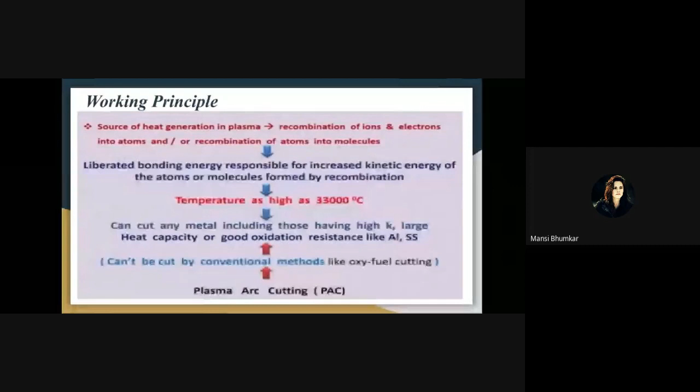Now this is a diagram. Okay, so here is this diagram, then I will explain.

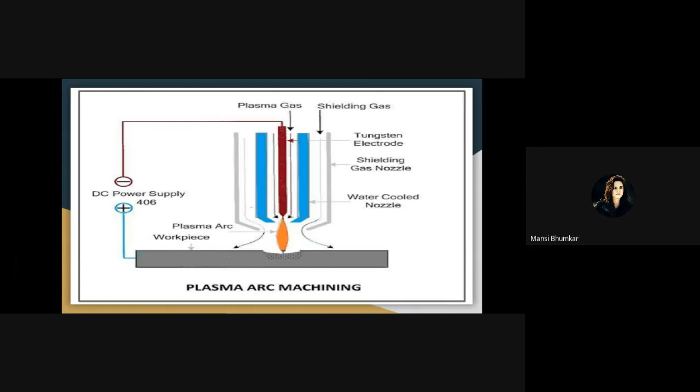The plasma gas is connected and flowing to the cathode. So surrounding this cathode, the plasma gas is coming and passing with a velocity. High velocity plasma gas is passing through the nozzle, and when it is passing through the nozzle, it is ionized. This highly pressurized, high velocity plasma gas is ionized.

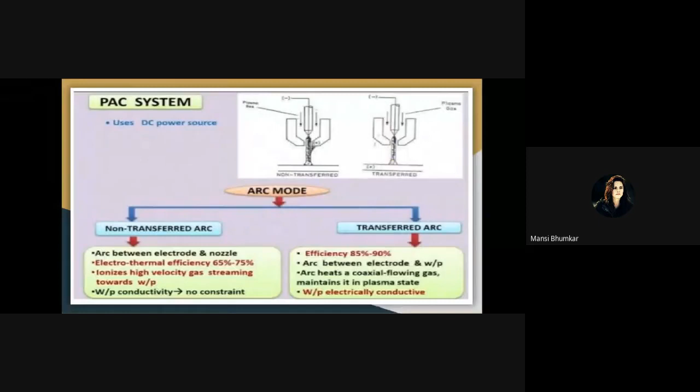So the plasma gas is coming, as you have seen in the non-transfer mode. Same way, the plasma gas flows surrounding this cathode electrode, and while it's passing through, it ionizes in this zone while passing through the nozzle. Here the electro-thermal efficiency of this transfer mode is very...

Now come to our point. I was talking about the transfer mode of this plasma arc machine. The case is that this transfer mode of plasma arc cutting can be used only for electrically conductive material.

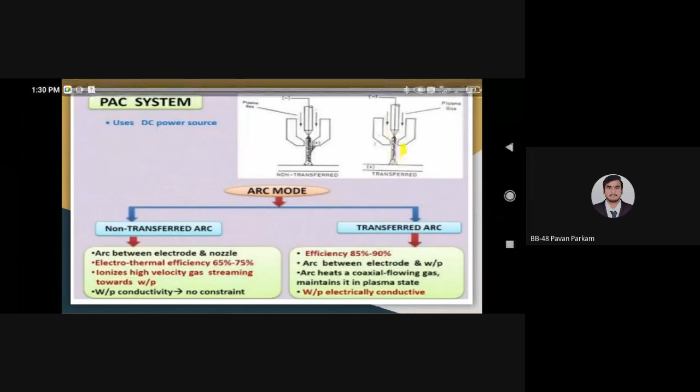Here you can see the plasma gas is coming surrounding the electrode, and while it is passing through here, it ionizes when it passes through the nozzle. The electrothermal efficiency here is very high, 85 to 90%, for this transfer mode of plasma arc.

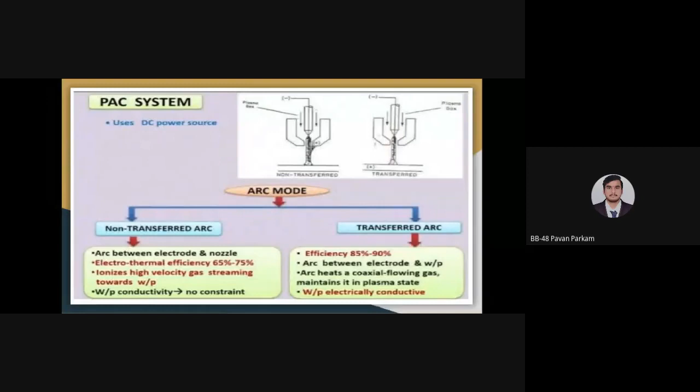So here, arcing is generated between the electrode and the workpiece, and the arc heats the coaxially flowing gas as well. So that coaxial flowing plasma arc actually maintains it in the plasma state only. I have written that also here.

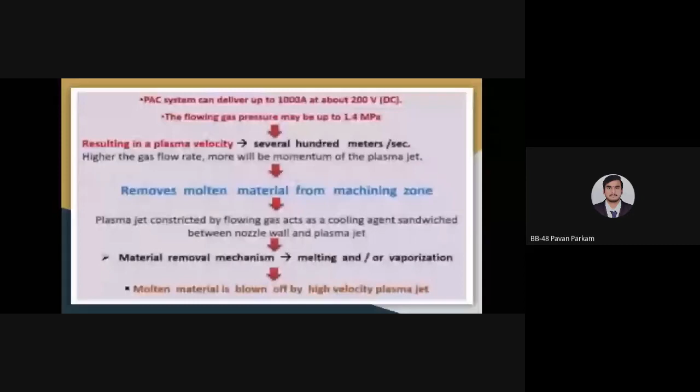Now this plasma arc system can deliver up to 1,000 amperes at about 200 volt DC.

This may be up to 1.4 megapascal. Because of this high pressure of the plasma gas, the plasma velocity is also very high at that time. So velocity is very high, and plasma gas can remove your molten metal due to the high velocity and high pressure. It can remove the molten metal from your workpiece surface. This plasma gas velocity is maybe several hundred meters per second.

So you can explore the momentum of your plasma jet. This high velocity of the plasma jet gives very high momentum of the plasma jet.

So whatever the metal removal process is there, that is by melting and vaporization, because as we know huge amount of heat is generated and the temperature rises around 33,000 degrees centigrade. This amount of heat can melt and vaporize the metal where this plasma jet actually touches on your workpiece metal. So here the plasma has temperature more than 33,000 degrees Celsius. Due to that only it is called the fourth state of the matter.

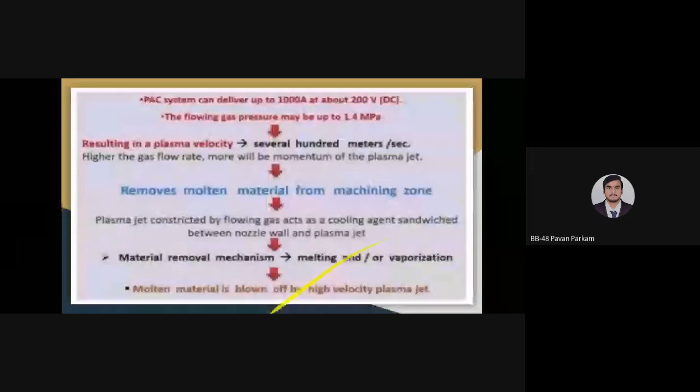There is a link between the nozzle wall and your plasma jet. As I mentioned previously, the mechanism from the workpiece is that of melting and vaporization, and that molten metal can be blown off by the high velocity plasma jet. So this is about the working principle.

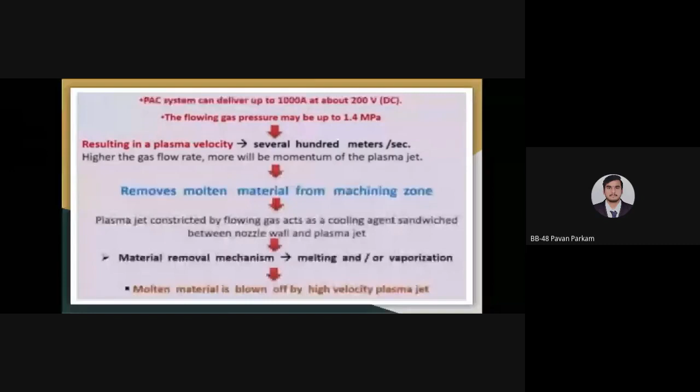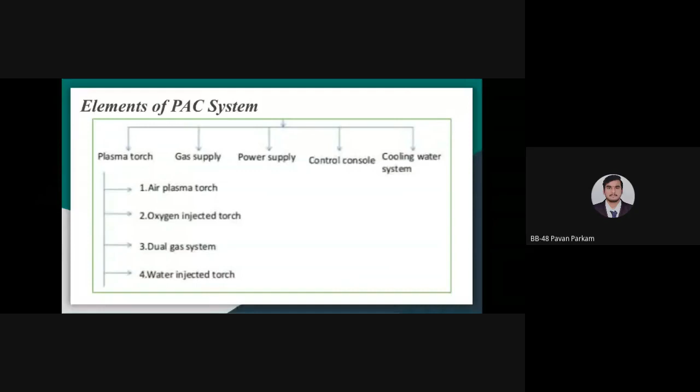Talking about this plasma torch, there are different kinds of plasma torches available in the market. You can see on the right side here a schematic diagram of the first one I have shown, that is the air plasma torch. So in this type of plasma torch...

This is a carrier gas, you can see the carrier gas is here, and that carrier gas is coming. Actually, carrier gas is your plasma gas, and normally that carrier gas is used as compressed air. So here compressed air is used. After flowing, it is going to ionize, and due to ionization plasma will be generated, and that is used for doing the cutting.

Here we have to take care that the air should be uncontaminated. If contaminated air is coming or some moisture is there, because of the huge temperature, it will damage the nozzle. If the air contains some micro moisture, and temperature increases, then it will damage the nozzle sometimes. So that is why your air should be filtered and uncontaminated compressed air is used as a plasma gas in this kind of air plasma torch.

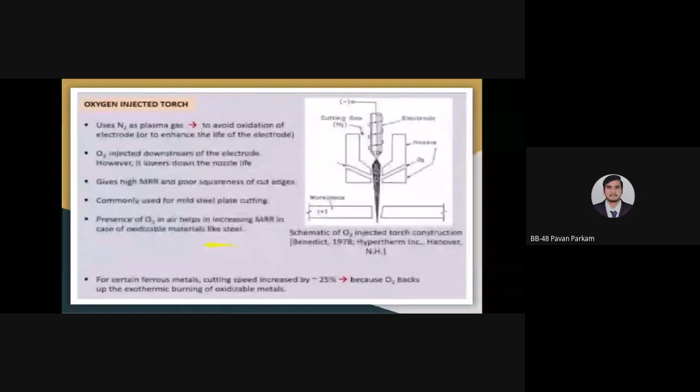This kind of air plasma torch results in a high degree of tapered machine surface. The cut surface on your workpiece shows high degree of taper. The electrode material normally used for this kind of air plasma nozzle is hafnium or zirconium.

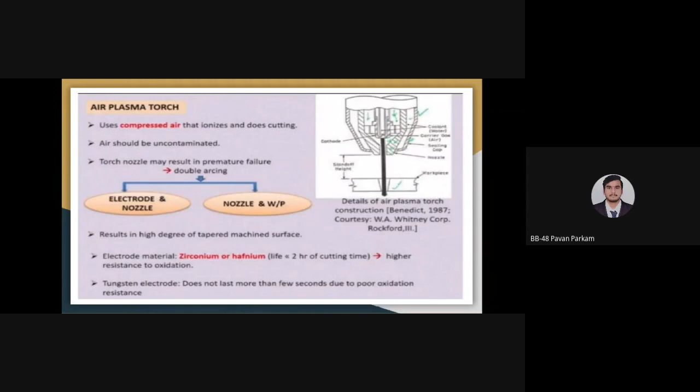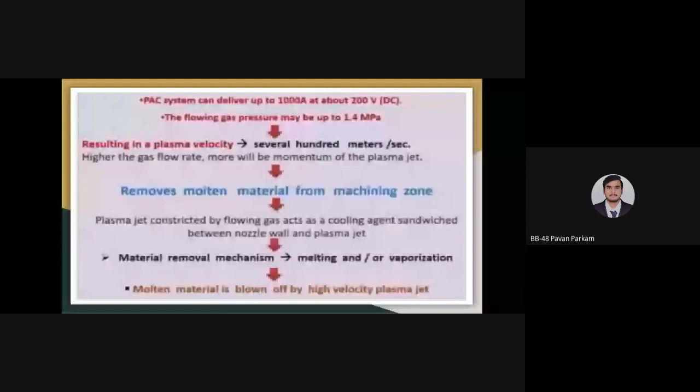Tungsten electrodes are not used here because tungsten does not last more than a few seconds, due to poor oxidation resistance. So tungsten is not used as electrode metal in case of air plasma torch. Only hafnium and zirconium are used, which have 2 hours of life and higher oxidation resistance. In other processes tungsten electrode is used, but in case of air plasma torch, hafnium and zirconium metal are used as electrode metal.

Then the second torch type is the oxygen injected torch. Here is the nozzle you can see.

Here nitrogen is used as plasma gas to avoid oxidation of the electrode or to enhance the life of the electrode. Oxygen is injected downstream of the electrode, however it lowers the nozzle life, and gives higher material removal but poorer quality of cut edges. This oxygen injected torch is commonly used for mild steel plate cutting, since the presence of oxygen helps increase material removal in case of oxidizable materials like steel.

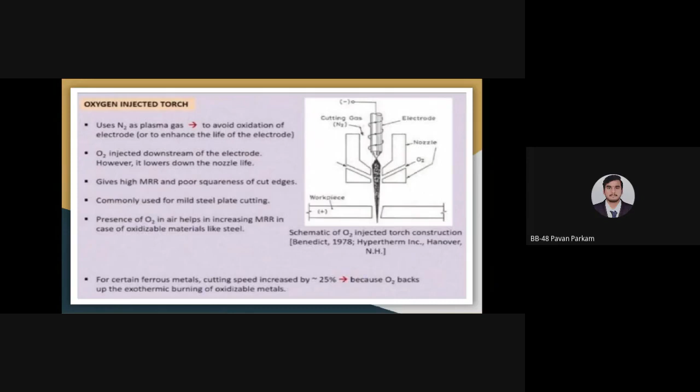Then the third one is dual gas plasma arc. Here also nitrogen can be used, and again oxygen or CO2 or argon, hydrogen, etc. can be used as a shielding gas.

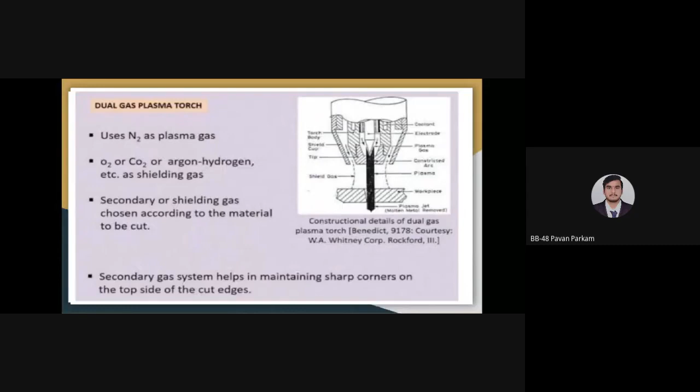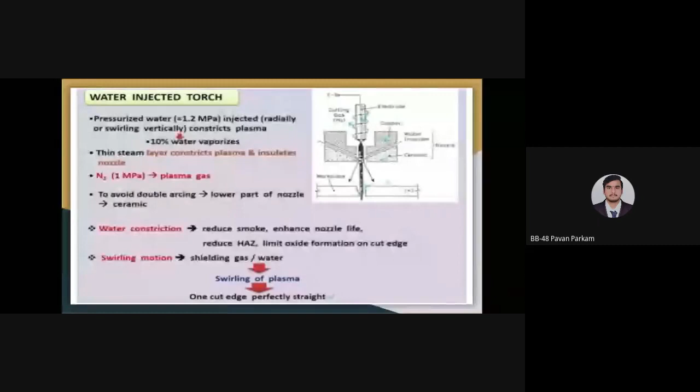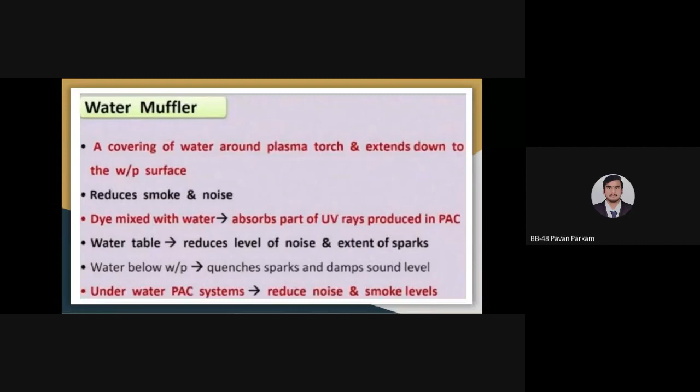Process applications and process performance we'll see in the next lecture.